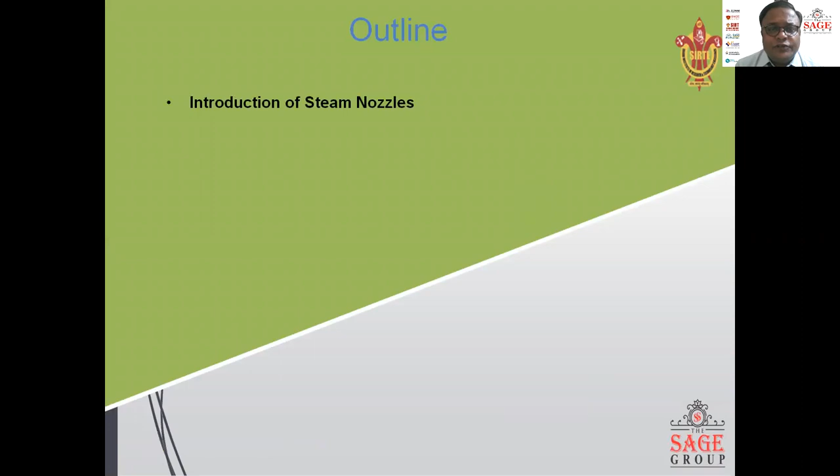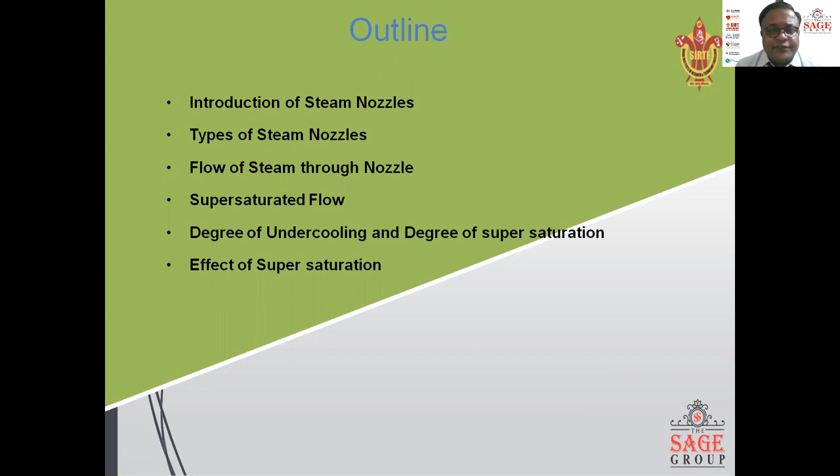This is the outline: introduction of steam nozzles, types of steam nozzles, flow of steam through nozzle, supersaturated flow, degree of undercooling and degree of supersaturation, effect of supersaturation, continuity and steady flow energy equation.

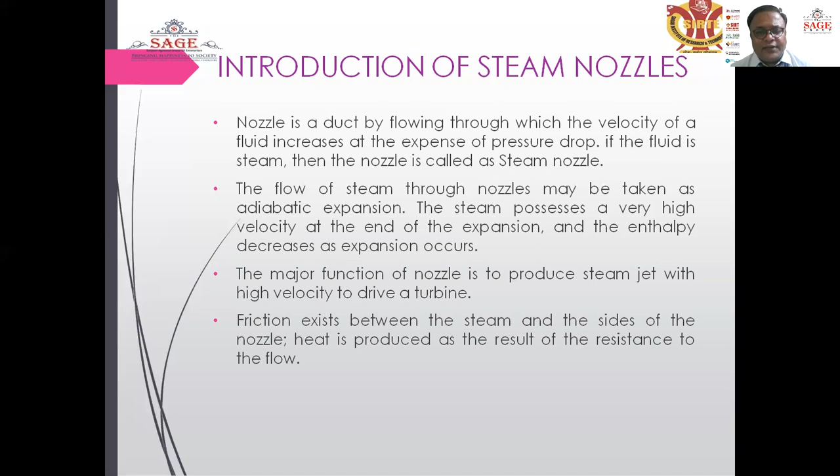The major function of the nozzle is to produce the steam jet with high velocity to drive a turbine. हाई वेलोसिटी की जो भी स्टीम निकल के आती है नोजल से उसको टरबाइन में भेजते हैं। फ्रिक्शन भी एग्जिस्ट होता है बिटवीन द स्टीम एंड द साइड्स ऑफ द नोजल, एंड द हीट इज प्रोड्यूस एज द रिजल्ट ऑफ द रेजिस्टेंस टू द फ्लो।

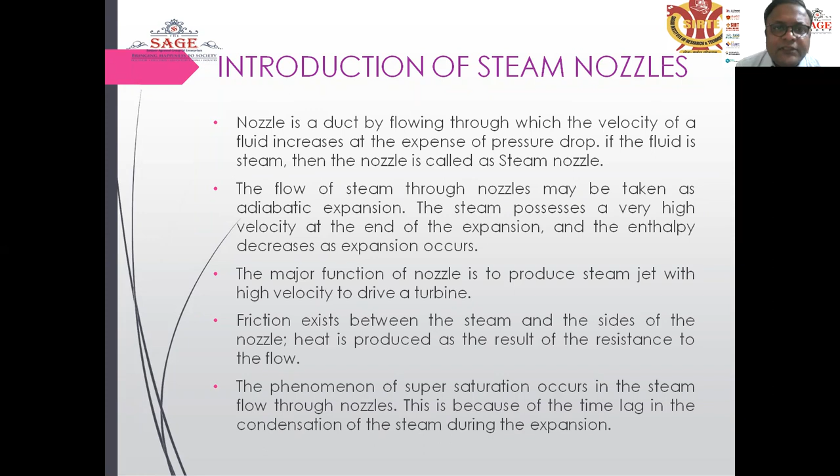अब स्टीम नोजल को किस तरीके से डिफाइन कर सकते हैं? एरिया ऑफ सच डक्ट हैविंग द मिनिमम क्रॉस सेक्शन दैट इज कॉल्ड अ थ्रॉट। A fluid is called compressible if its density changes with the change in pressure brought about by the flow. If the density changes very little or does not change, the fluid is said to be incompressible. Generally, gases and vapor are compressible, whereas liquids are incompressible.

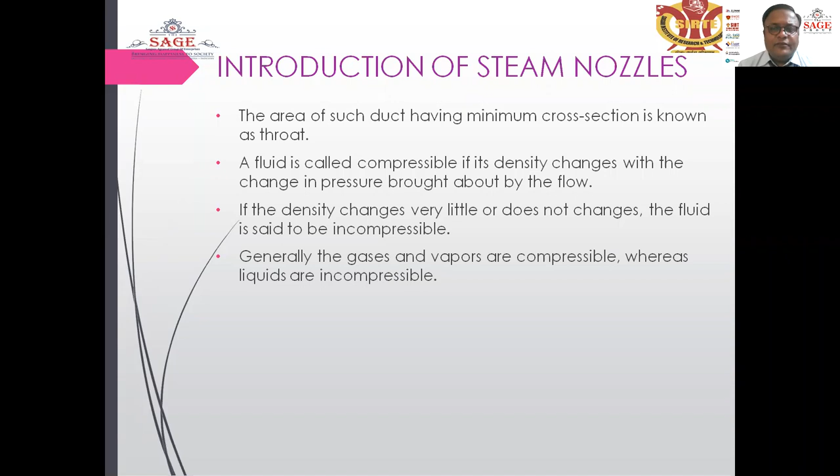There are three kinds of nozzle: convergent, divergent, and the convergent-divergent nozzle. First is the convergent nozzle, where the cross section area continuously reduces from entrance to exit. There will be chances of increase of the velocity. This is the first kind.

Second kind is the divergent nozzle, where the cross section area is increasing from entrance to exit, and this is the minimum cross section area if the convergent and divergent nozzle can be made to a single unit. यदि कन्वर्जेंट और डाइवर्जेंट नोजल को एक सिंगल यूनिट के रूप में काउंट किया जाए तो यहाँ पे एक मिनिमम क्रॉस सेक्शन एरिया थ्रॉट का आता है जहाँ वेलोसिटी बहुत ज्यादा रहती है, काफी तेज एक्सपांशन होता है यहाँ पे।

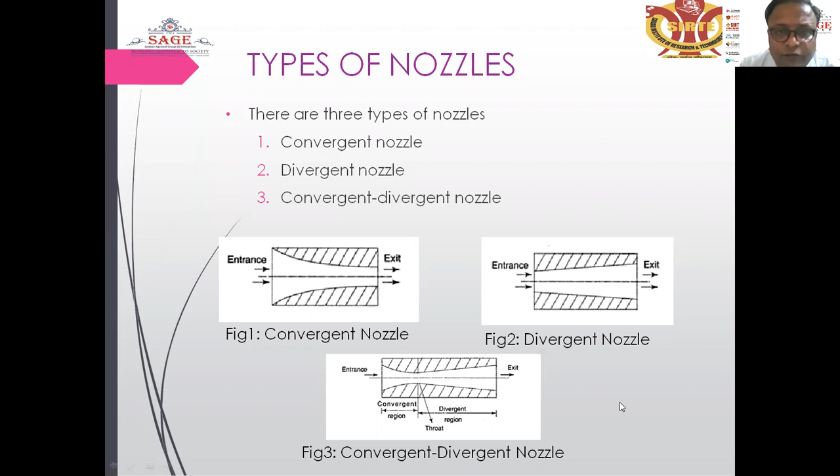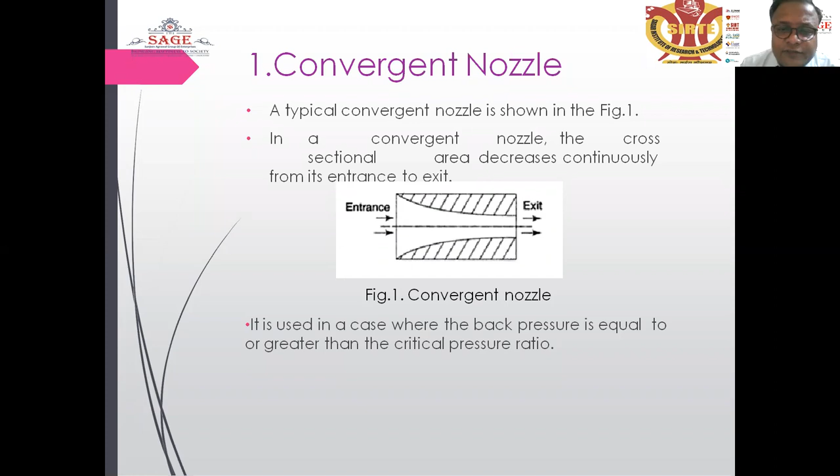It is used in a case where the back pressure is less than the critical pressure ratio.

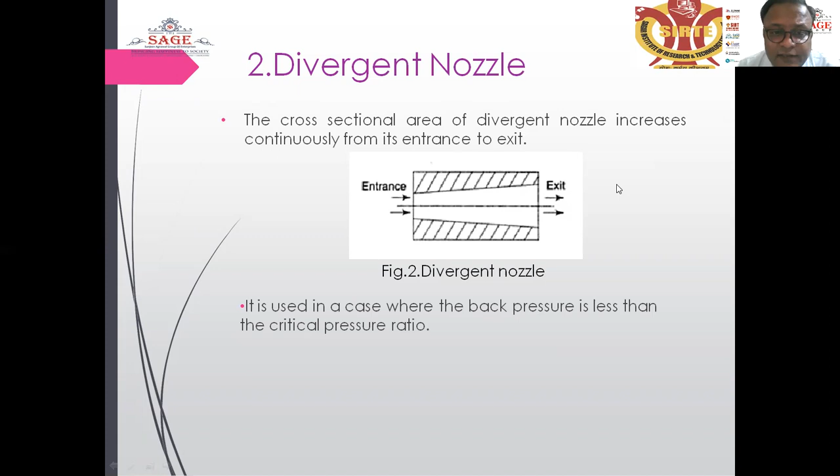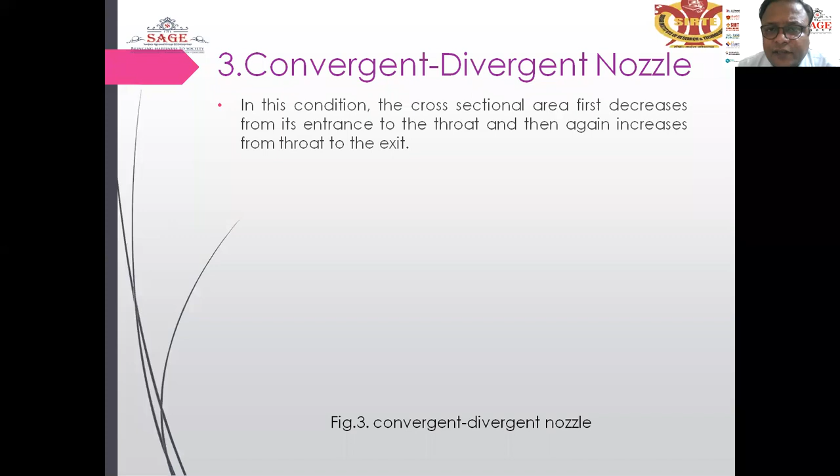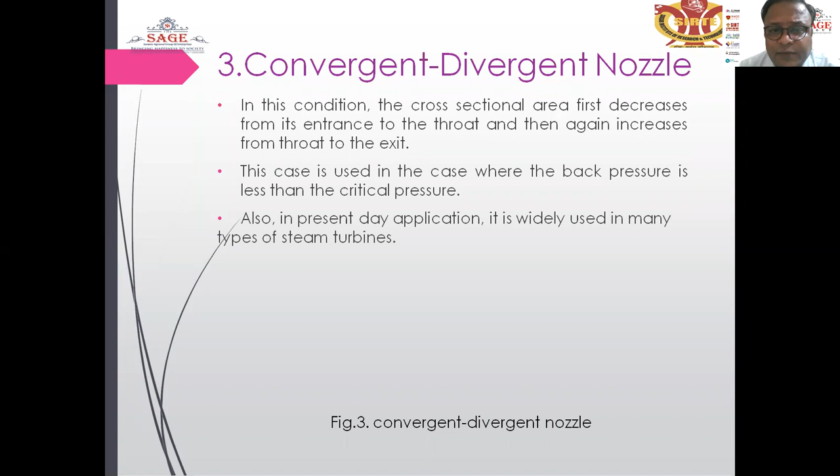The CD nozzle, called a short form CD nozzle or convergent divergent nozzle, has a cross section area that first decreases from the entrance to throat and then increases from the throat to exit. This case is used where the back pressure is less than the critical pressure, and it is widely used in many types of steam turbines today.

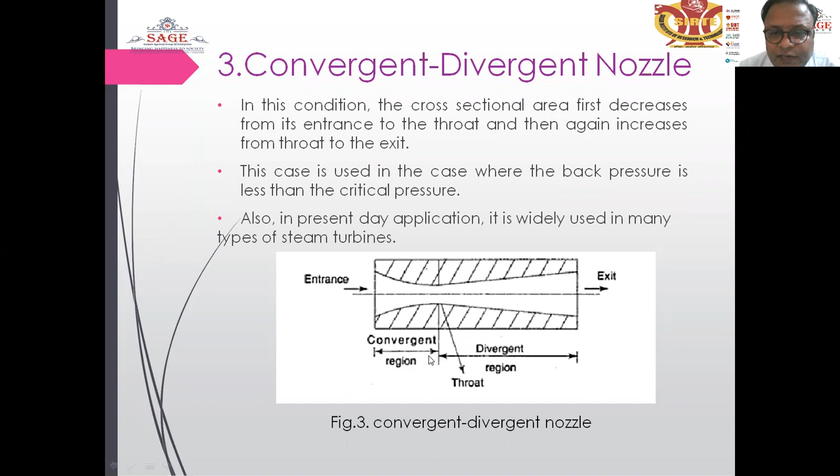From entrance to exit, the cross section area decreases from the entrance to the throat portion, and from the throat portion to the exit portion there is a continuous increase of the area. So from entrance to exit, this is the convergent region, this is the divergent region, and this is the throat region, showing the flow of steam through the nozzle.

What is the effect of friction on the nozzle? The entropy will be increased, energy available decreases, velocity of flow at the throat gets decreased, volume of flowing steam is decreased, and throat area required to discharge a given mass of steam is increased.

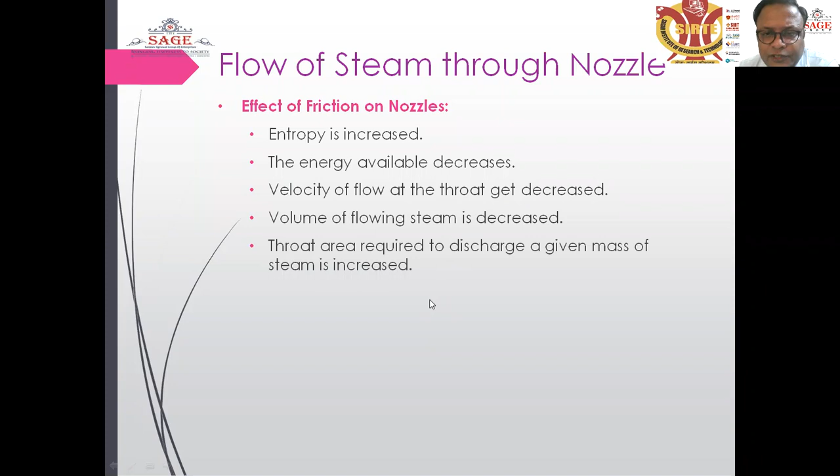This is the condition of flow of steam through the nozzle called supersaturated flow or metastable flow. When the steam expands in the nozzle, pressure and temperature decrease. It is likely that the steam starts condensing when it strikes the saturation line, but this is not always the situation. Due to the high velocity, the time the steam resides in the nozzle is small, and there may not be sufficient time for the needed heat transfer and formation of liquid droplets due to condensation.

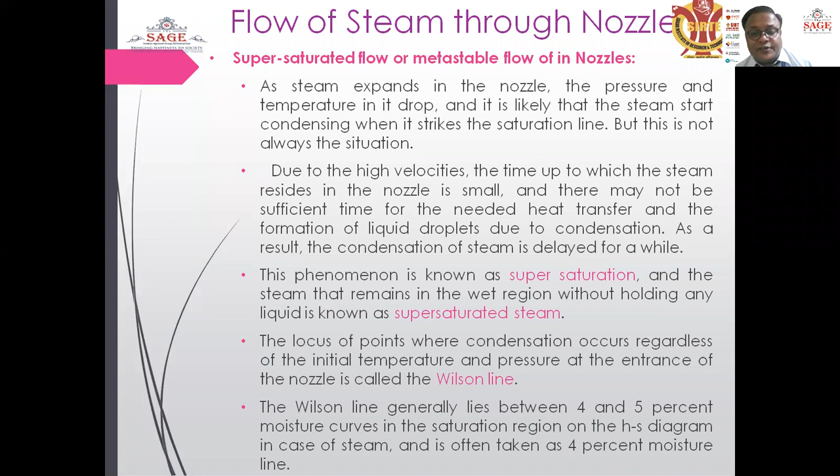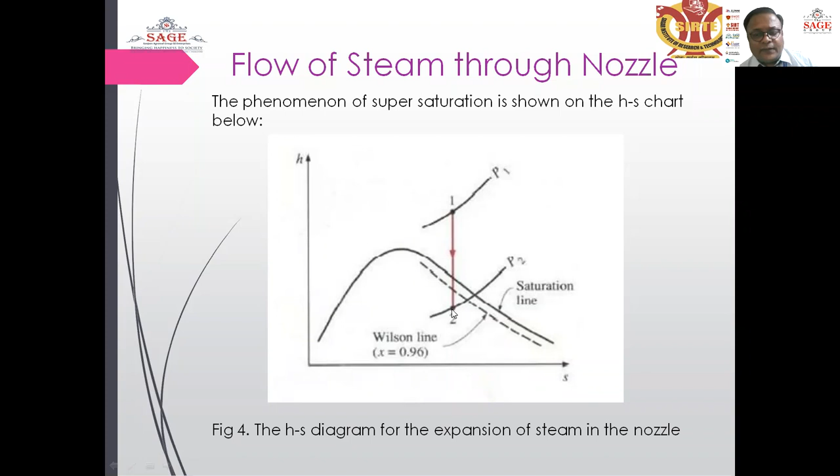This is the diagram where the flow of steam through the nozzle takes place. This is the HS diagram, called the Mollier chart, where high pressure steam and superheated steam pass through the nozzle from point 1 to 2. This is the superheated steam passing through this line, and this is the saturation line. Below the saturation line the dryness fraction will decrease, until the dryness fraction reaches 0.96. This is the curve below the saturation line, and steam flow is taking place in the nozzle.

The HS diagram shown here represents the enthalpy versus entropy diagram, where the expansion of the steam is taking place. This is the graph where everything is clear when the steam is expanded from point 1 to 2.

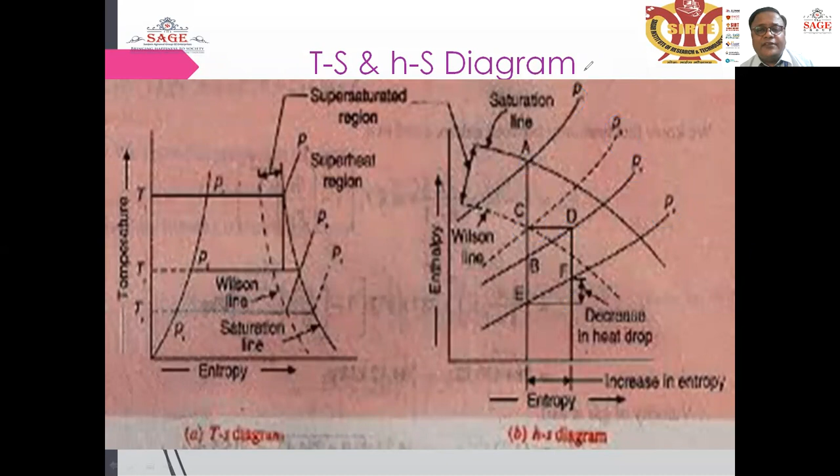So what is the formula for the degree of undercooling in supersaturation? Degree of undercooling is represented by the temperature T2 minus T2 dash, that is the saturation temperature corresponding to a point B, minus the actual temperature, that is

For this purpose, we have TB upon TA is equal to PB upon PA to the power of 0.3 by 1.3. And the degree of supersaturation, that actual process pressure at the supersaturated state B, is P2, but the saturation pressure corresponding to the temperature TB is also considered.

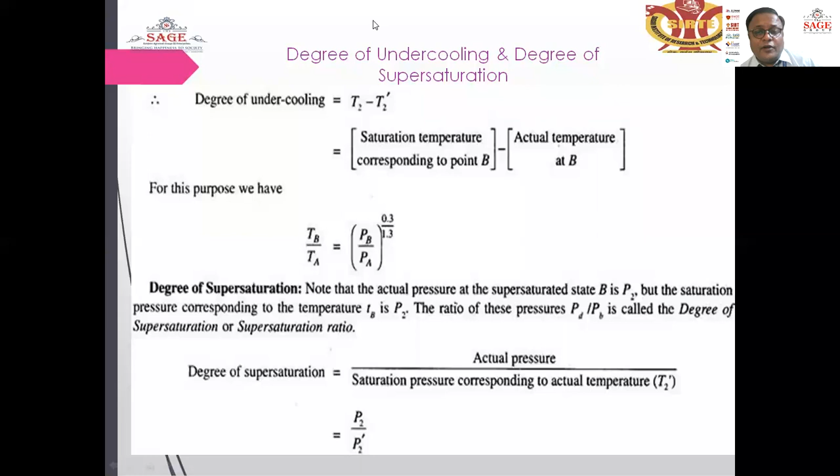तो यहाँ पे जो अभी नजर आएगा डिग्री ऑफ सुपर सैचुरेशन, that is the formula of P2 by the P2 dash. This is the formula in which the clear condition of the degree of undercooling and the degree of supersaturation is given.

Continuity and the steady flow energy equation through a certain section of the nozzle. तो यहाँ पे इक्वेशंस दिखाई गई हैं जो कि हम स्टडी फ्लो एनर्जी इक्वेशन थर्मोडायनेमिक्स में पढ़ते थे, उसी इक्वेशन का इस्तेमाल करते हैं नोजल की एग्जिट वेलोसिटी निकालने के लिए.

We know that the enthalpy at point 1, that is steam is passing through from the boiler through the nozzle, and this is the inlet velocity, which is very less, and the initial potential energy plus the heat transfer is equal to H2 at the exit section. C2 is the exit velocity, GZ2 is the potential energy at exit point 2, and this is the work done.

After the calculation where the heat transfer is 0, this is 0 because of the adiabatic expansion, and GZ1 is equal to GZ2 because there will be no change of potential energy, and W is also taken as 0 value because no work done is required in the nozzle, because when the boiler is connected to the nozzle, steam will automatically pass through it, with no work required.

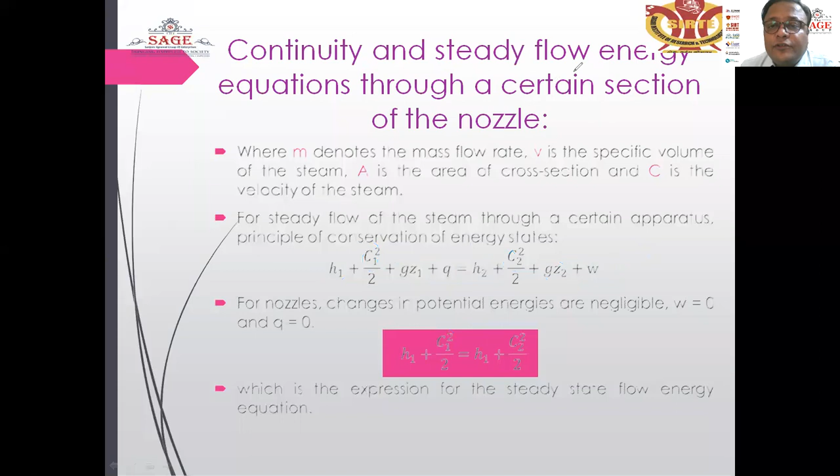So the remaining factor is H1 + C1 square by 2 is equal to H2 + C2 square by 2, which can be found easily from the exit conditions. तो H2 की velocity या C2 की velocity वो आप निकाल सकते हैं इसलिए.

So this is the basic introduction about the nozzle. So what is the effect of supersaturation? The following are the effects of supersaturation in a nozzle.

The temperature at which the steam becomes supersaturated will be less than the saturation temperature corresponding to that pressure, and therefore the supersaturated steam will have density more than that of the equilibrium condition, which results in the increase in the mass of steam discharge, and supersaturation causes the specific volume and entropy of the steam to increase.

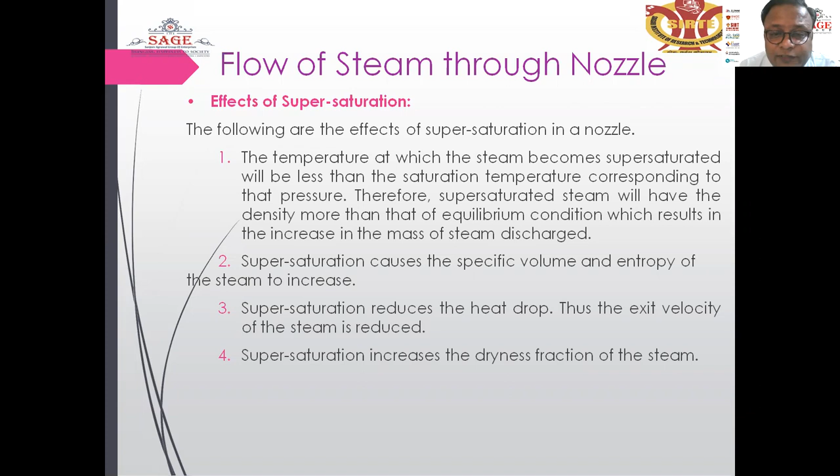Supersaturation produces heat drop को reduce करता है, thus the exit velocity of steam will be reduced. और इसके बाद exit velocity जो है steam की वो reduce हो जाती है. Supersaturation increases the dryness fraction of the steam. So this is the basic introduction of steam nozzles.